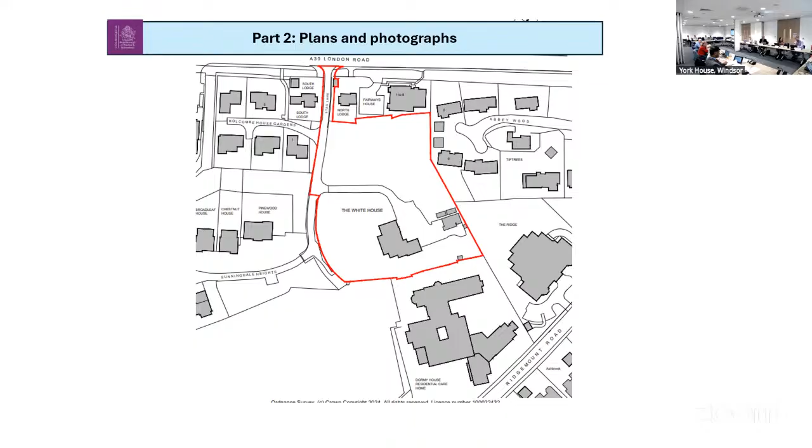This is just the site location plan showing the White House, and it's quite a big garden area to the house, we've got the sloping site. And this is the proposed layout.

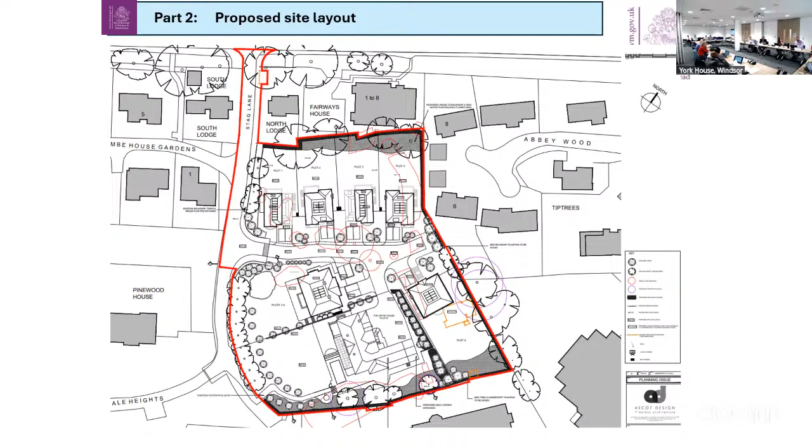To the northern part, you've got the 4 detached dwellings, and then to the southern part is the White House, which is the existing dwelling to be extended. To the north of the White House, there's the apartment building with 3 flats, and then plot 5 is just to the southeast of the site.

I thought it'd be useful to bring up that there was a previous application reviewed on this site, which was determined under the flat balance. It was under the 21 framework, when the council was in a position where they could demonstrate a 5-year housing land supply. In that case, the harms arising were assessed against the development plan, and there was conflict.

In terms of the changes, for the dwellings to the north, plots 1 to 4, they've been reduced in scale and mass by breaking up the massing and bringing the 2-storey element in a bit closer, with more gaps. But ultimately, the biggest change will be the retention of the White House, with the apartment building proposed to the north of it, whereas before it was a larger garden area to that house.

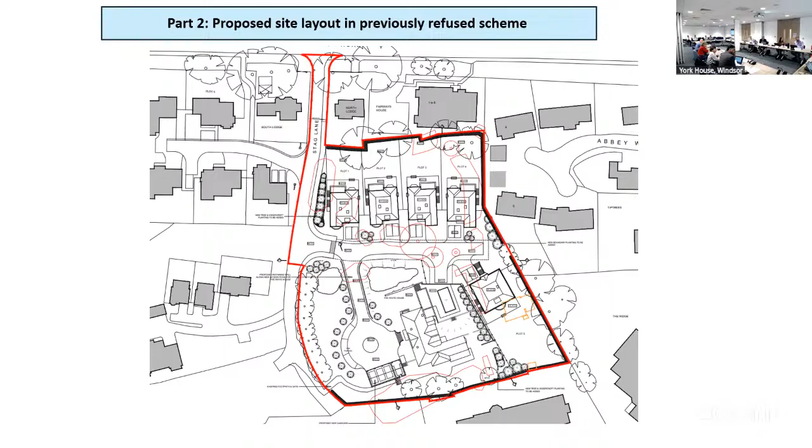The access up to the site, Stag Lane, which is highlighted on the plan, is about 4 metres wide at the moment. In terms of this scheme, we'll widen this road and provide a footway up to the site, which is included in the red line.

Certificate B has been served on the owners of that, so it's a condition to secure that widening of the access before occupation of the development.

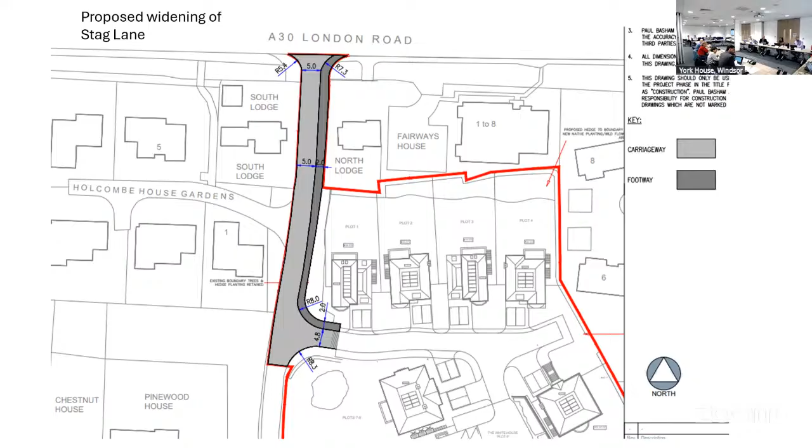So I'll just run through some of the elevations. These ones are plots 1 to 4 towards the northern part of the site. You can see the front elevation, quite a typical two-story house, but it's the levels at the back where the scale and height comes from to the rear.

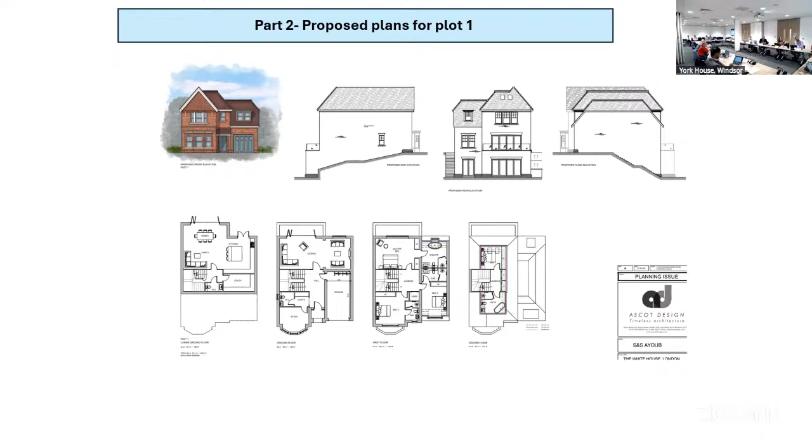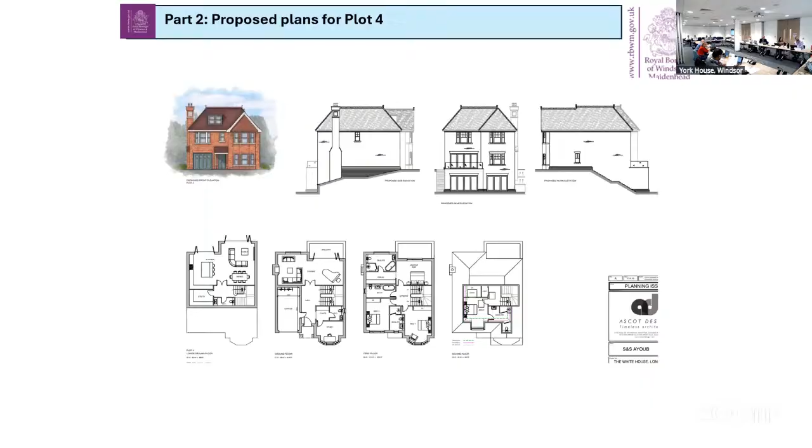Plot 2, and then plot 3. Similar design approach, but from the previous scheme, it's the scale and massing of the roof form and the setdowns to break up that massing, and the size of the crown roofs have been reduced. And this is plot 4.

And then plot 5, which is the five-bedroom house proposed. As you can see, with the sloping nature of the site, you get that taller front elevation, but at the back it's more typical two-story.

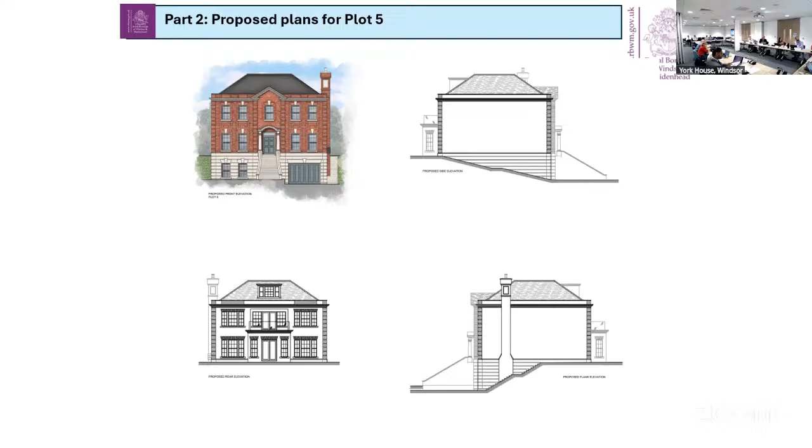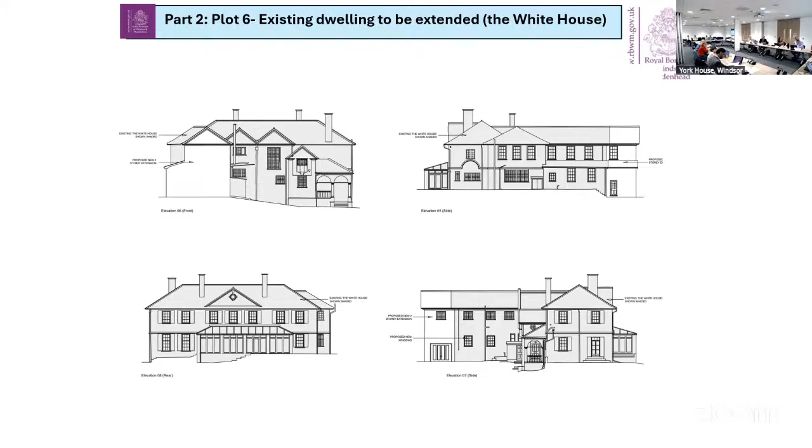And then this is the existing dwelling, the White House. The bits greyed out are the existing dwelling, and the bit marked shaded white is the two-story extension, but that stays a five-bedroom house, just making more space.

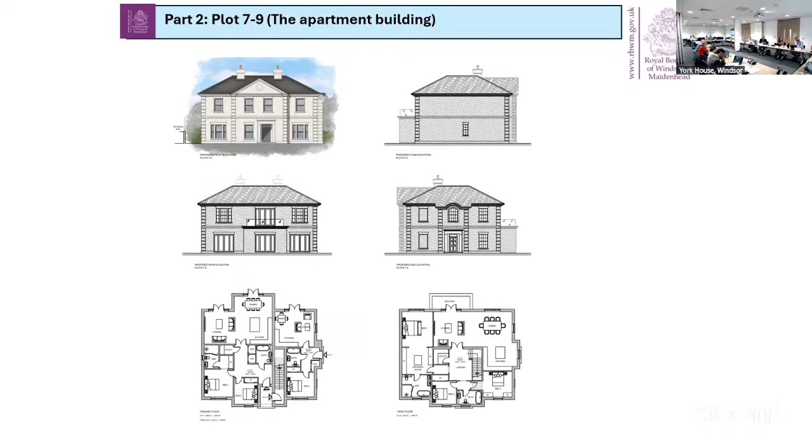And as I said, the site is sloping, so in terms of level changes, the way the dwellings are, it's working with the slope. There are going to be changes to levels to accommodate that, and that varies across the site - a few metres in some parts.

And you can see the greyed out building is on the site next door to the south, just to show you that relationship.

And then these are the section drawings. You can see through the centre of the site, going horizontal, section CC. This is the view of the four dwellings looking onto the front elevations from that internal access.

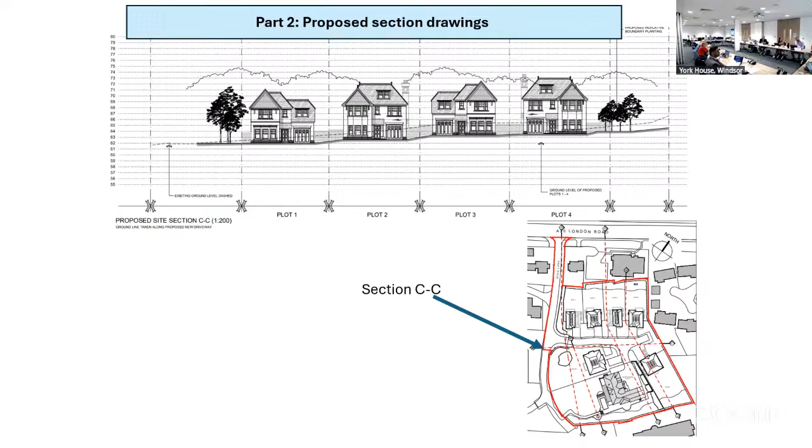And then I thought it was helpful to have a section drawing from the last scheme that was reviewed, so you can see the differences. These ones were not as broken up in scale and mass. They've had to do work now breaking up the massing.

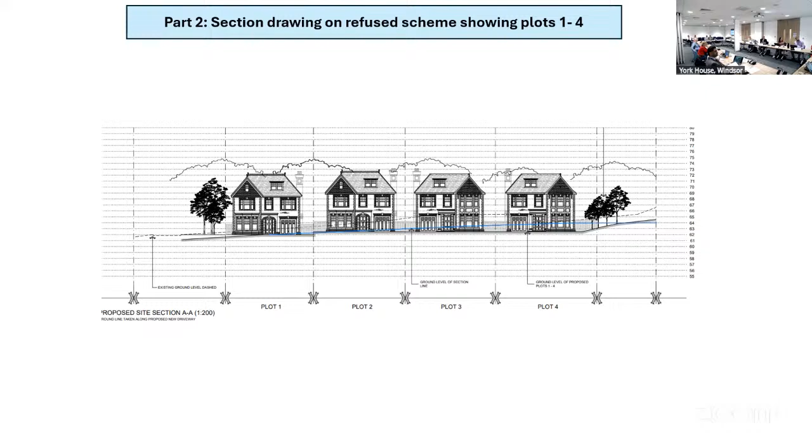So section D, running through plot 1. Again this is just showing the level changes. The dotted line is where the existing ground level is, and where it's going to be lowered to do the lower ground level.

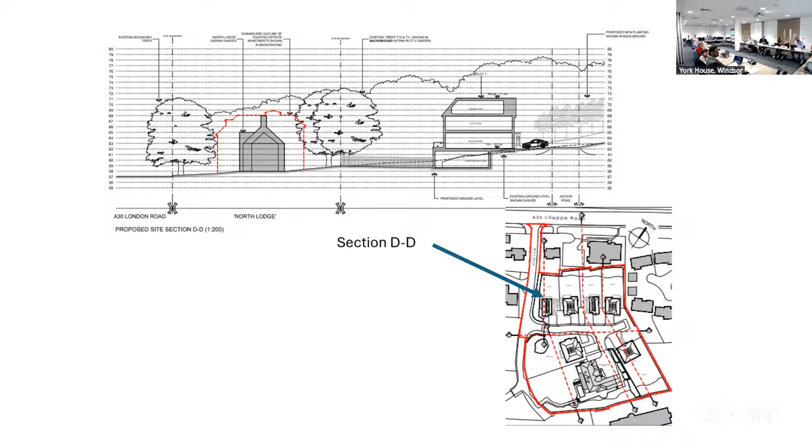And then section E runs through, showing plot 4, and the red dotted line indicates number 9 Abbeywood, which is beyond that to the northeast. And then you can see plot 5, which is next to it. On the section it looks closer, but the section line is not drawn straight - that just shows that dwelling is at a higher level, but they are taking the ground down quite a lot from the existing level.

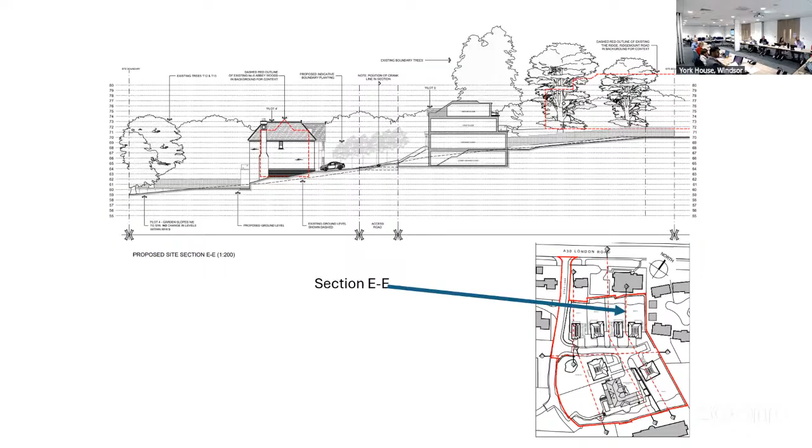And then I've got the tree constraints plan up. You can see a lot of the tree and vegetation is coming out within this main part of the site to accommodate the development, and also for the widening of the footway up the site. Trees are removed there because that needs to be done to provide the road widening of the footway.

The trees were a particular concern in the previous refusal - I think the focus was on T35, which is a B category tree. That's labelled. The building doesn't actually incur into the root protection area, so it's close, but because it's not making a direct incursion to the RPA, it's not considered to be significant harm.

And then the T4 tree, where the road widening is, near North Lodge, is shown to be retained, and because of the level of incursion into the root protection area of that tree, the council tree officer advised it's probably not going to survive long term. But it's a balance, since what the site proforma required was an improved access, a pedestrian footway - so it's that trade-off.

So I think because it provides that widening of the footway, that harm, that impact is considered to be limited in the balance.

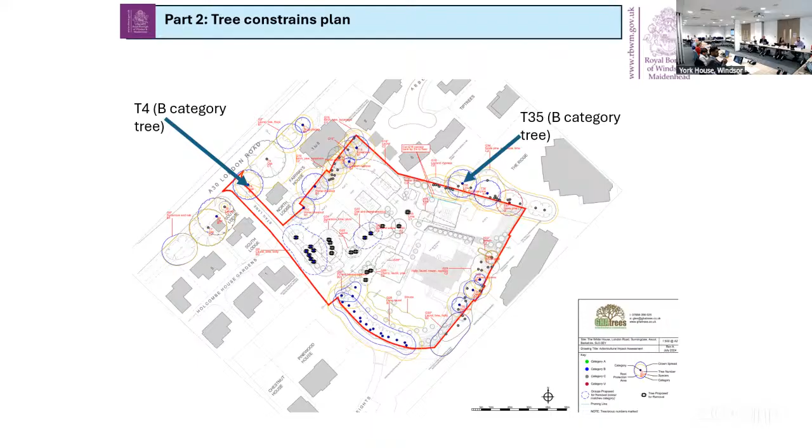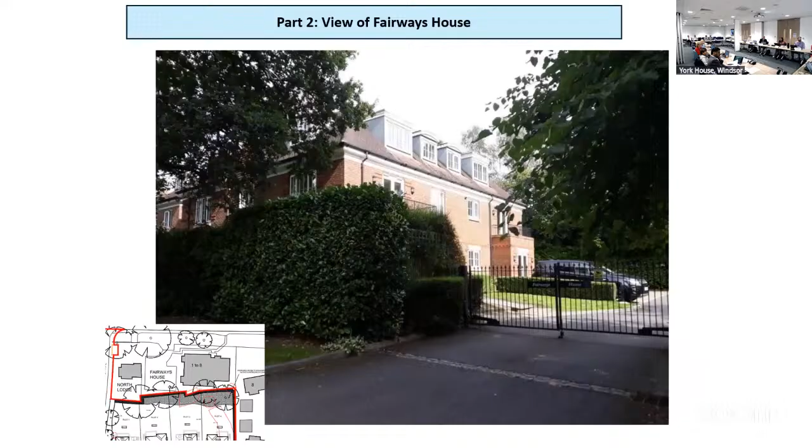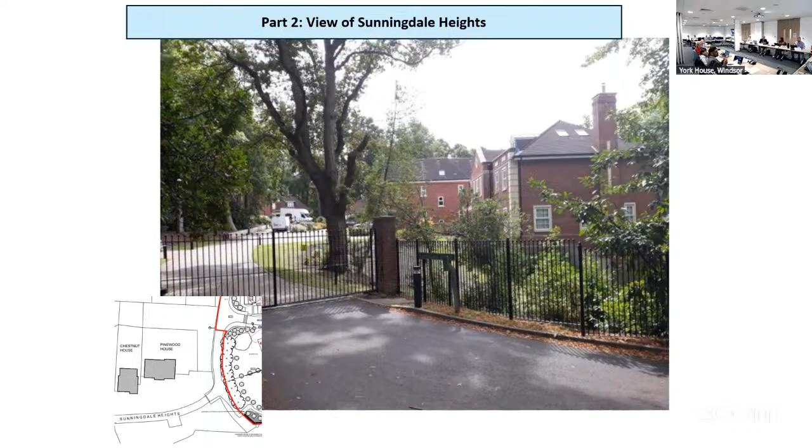And then Sunningdale Heights, which I think was granted permission around 2014 on appeal. You've got an apartment building there and some quite substantial houses, which work with a sloping site, so a similar arrangement with the elevations.

What I would say as well is there will be new tree planting and landscaping on site, partly for the character, but partly as well for achieving the biodiversity net gain.

I wanted to pick up on the previous refused application, because that is a material consideration for the determination of this application. That was for 6 dwellings, and it was refused under tilted balance, because it was a different framework, different time, different position of the wider housing land supply. One of the reasons was the inefficient use of land, because it was now an allocated site for approximately 10, and it was going to deliver 6.

But now this has come up to 9, it's not hitting 10, but it's one below, so I think that reason is overcome. The plans demonstrate the scheme being designed to adapt and mitigate climate change. The energy statement's being submitted, reviewed by the sustainability officer, who's confirmed it would be net zero carbon. That would be one of the provisions secured in the legal agreement.